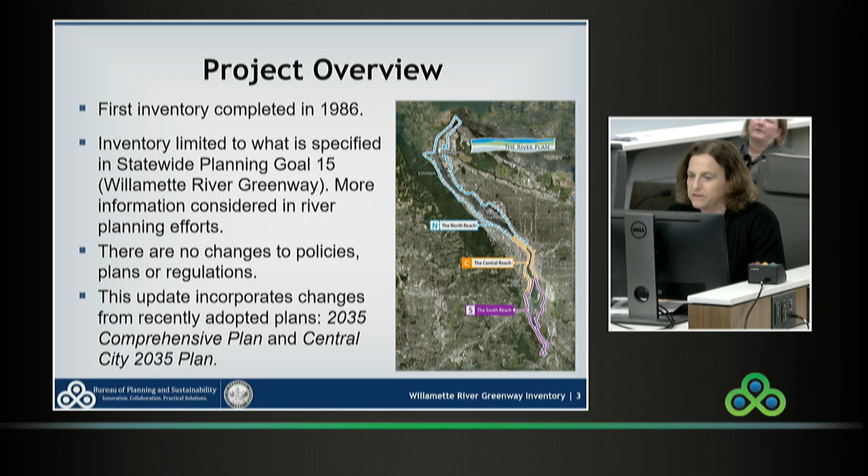Just a quick little bit on the process. We developed this proposed draft of the inventory in February. We sent notices to over 5,000 property owners and others interested in the topic about an open house and this hearing. We communicated this project through our River Plan News, which is an electronic newsletter, and through the project webpage. On March 6th, we held an open house on the inventory, and 15 people attended.

So the inventory is made up of maps and data, and these are the topics that are reflected in the inventory as per statewide planning goal 15: land uses, base and overlay zones, ownership, natural resource characteristics, recreation, and historic cultural resources. Most of the data comes from our geographic information system data. There's also county and other data sources reflected in this inventory. The 2 notable changes to the inventory reflect the Central Reach, and again with the Central City Plan, there have been changes to zoning, overlay zones, and scenic and natural resources. Changes elsewhere in the Willamette River Greenway boundary reflect new zones that were applied through the 2035 Comprehensive Plan.

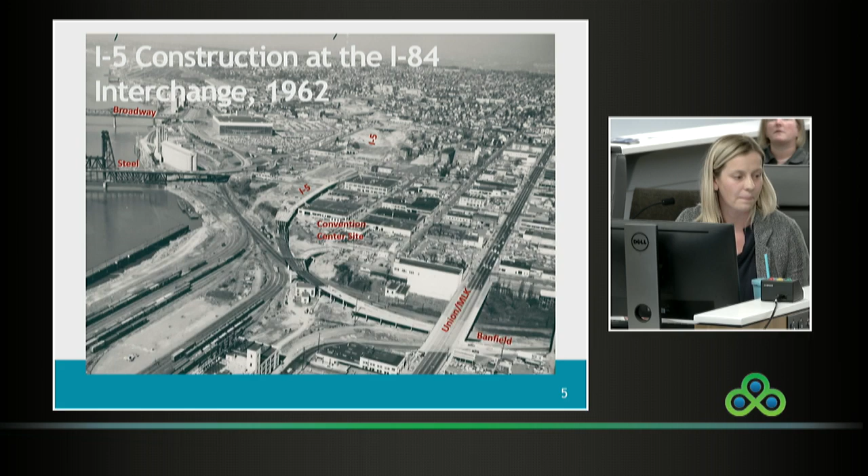All right, can you hear me? So, Mauricio here - I was there in 2010 when the city, Portland, and ODOT got together to see if they can do something better about this area. We had done a lot worse in this area in the 60s.

As you can see in the picture, and Caitlin already mentioned the impacts - you can see the building of I-84, the building by I-5, thank you, the Memorial Coliseum, and then the Emanuel Hospital. So a lot of interventions that really decimated what was once a vibrant city, African-American city of Albina.

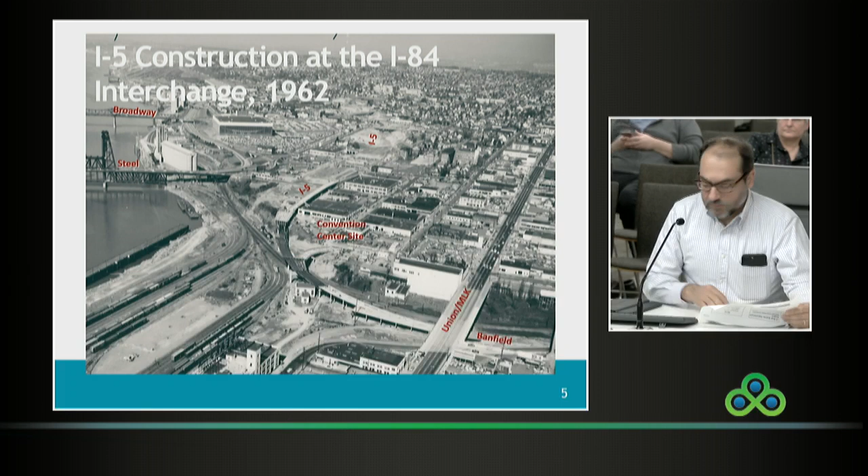An idea that we've always had is, can we get some of that back, some of that connectivity that we lost, among other things. So the city was engaging in the update of the Central City Plan, and we decided after the framework plan to do a quadrant. This was the first one, Northeast Quadrant.

As we looked at what to do, what could we do, we looked at obviously the freeway as, so to speak, the big elephant in the room. How can we improve the area without really addressing the freeway impacts? So that led to conversations with ODOT as to what could we do together - is there something that we can do that actually benefits the freeway network, the regional, state, and national network, as well as improving the area that we're working on?

And we engaged in a long conversation to see what that would look like, and what a planning process would look like, and what are the things that were acceptable and not.

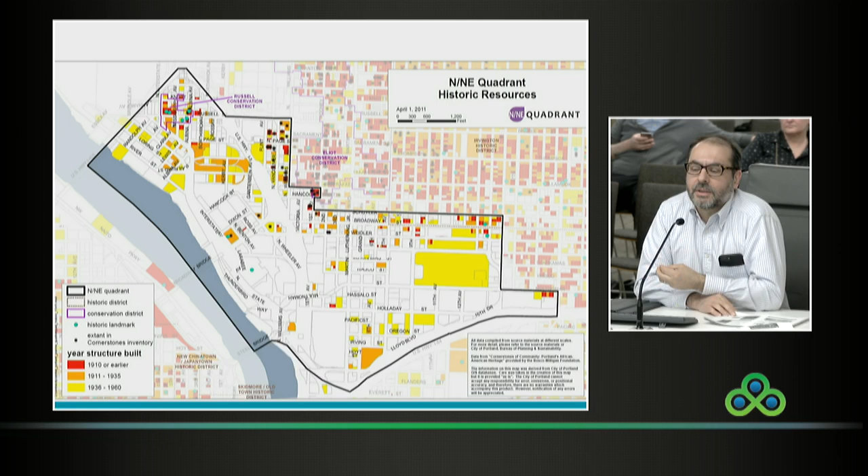Here you see a picture of an inventory that we commissioned - the Bureau of Planning at the time, and Sustainability - to identify the historic resources, many of them African-American resources, and we made a commitment that as we work on the design, we would not further affect this inventory, which was so lost. You can kind of see outside the study area, all that red means old, and white basically has been replaced. So we did a lot of history.

There's a lot of important buildings, like the Left Bank building, which has a history with the jazz music history in Portland. Also nationally, you can see there Louis Armstrong. So a lot of assets that we had that are underutilized because it's surrounded by this freeway that affects the local system.

At the same time, acknowledging that this is part of the city, but also part of a regional network - this area, the Rose Quarter area, it's an interchange that funnels I-5, I-84, which actually terminates here, I-405, and Highway 30. So it all has to converge in two lanes, in a very narrow space by design.

Two lanes cross under Broadway and Weidler with no shoulders, so if there's a crash, there's nowhere to pull over. And we see delays through much of the day. It also provides access to the Lower Albina area and directly to the Lloyd District in North and Northeast neighborhoods.

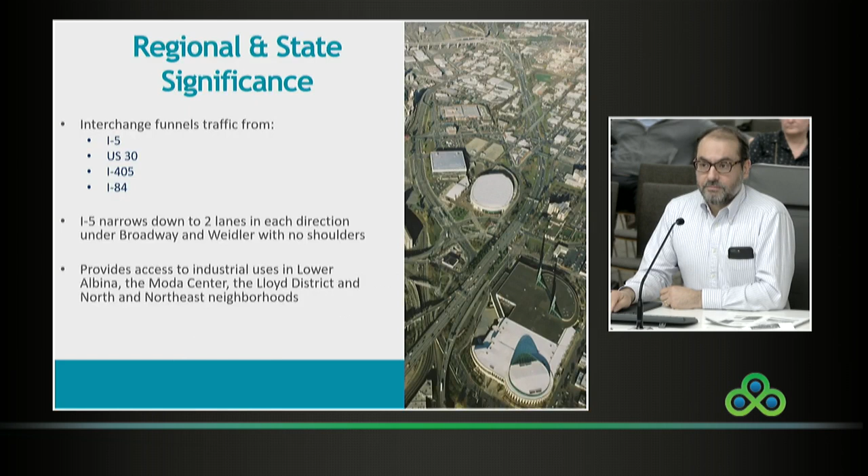It's also one of the major freight bottlenecks in the country. So the answer was that with some preliminary analysis, there were things we could do that would benefit the city and the regional system, the ODOT system. But we could do better than this project.

This is the project that was in the RTP, the Regional Transportation Plan, as the thing to do. A very expensive project that significantly expanded the freeway with a flyover, removed local crossings, further distorted the street network that was replaced in the 60s, and caused a lot of loss of sidewalks and bicycle connections. So that was the starting point. That's what we were stuck with for many decades, trying to do what the regionals wanted to do.

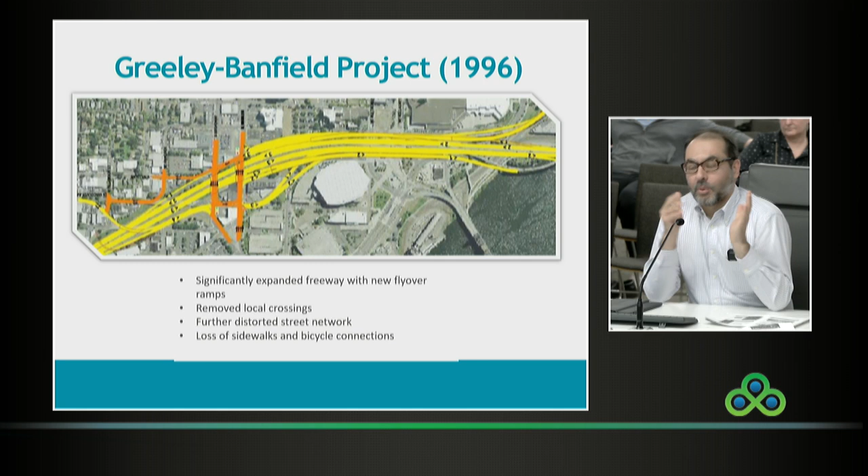We were saying, no, that's not going to work for us. Can we do something better? Let's explore it via this plan. So we got busy. We got a large committee of 30 people, and we developed a land use and urban design plan with a strong transportation component and a freeway facility plan, all together. They're not divorced, they come together.

So that's important to consider as you look at what's within the project you'll see later today. Those two projects have been adopted by council, by the Oregon Transportation Commission, and Metro, so they're part of the regional transportation plan. We formed a large committee and met 19 times. Overall, we had 85 community meetings.

Here's a summary over about 2 years. About 3,000 people participated directly. And we ended up with something that we think is a project that improves the regional network, the local network, and also provides the growth and urban design framework for the Lloyd District and the Rose Quarter to thrive. We're expecting about 8,000 new housing units and 9,000 jobs in the next few decades. This plan and project helps frame and reweave the two sides of I-5 in a way we haven't done before.

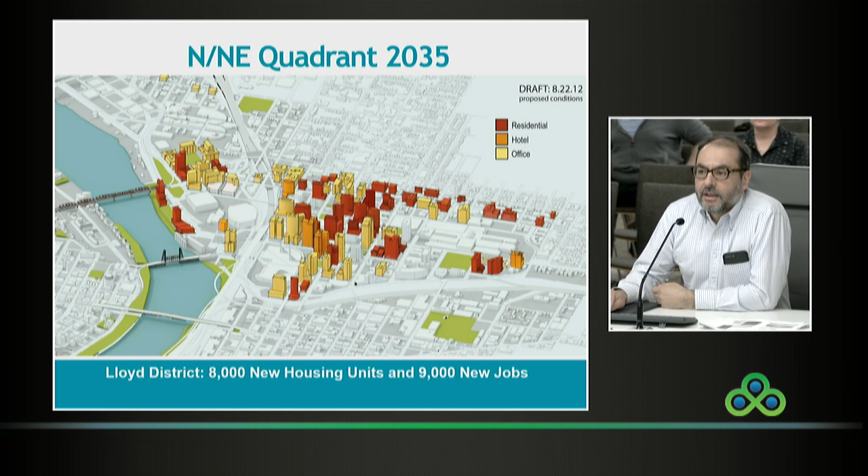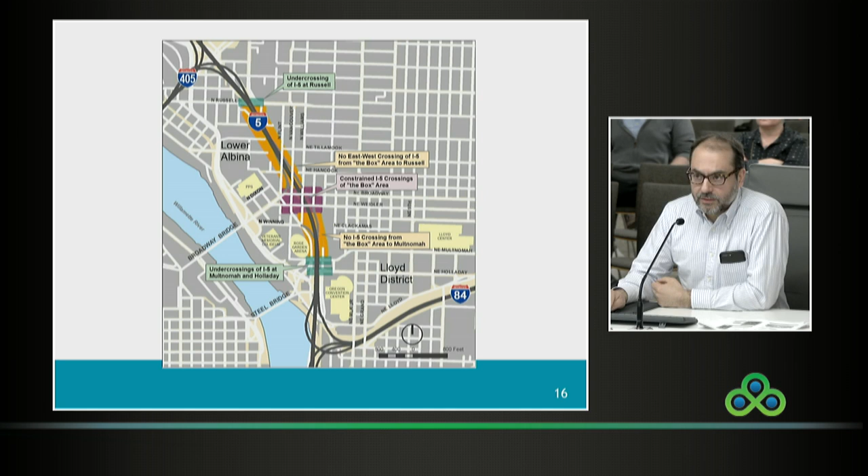And in a way that wasn't even contemplated in our plans. As you'll see, the idea of lids, the idea of replacing 5 bridges with new infrastructure, that wasn't even in our city plans at the time. A key component to consider is that there was a lot of lack of connectivity, particularly east-west. The areas in orange show that lack of connectivity. We were trying to address that, and as you'll see in the final design, we have connections to the south of Broadway-Weidler and to the north of Broadway-Weidler, again creating the redundancy that a grid used to provide, and now we wanted to provide again.

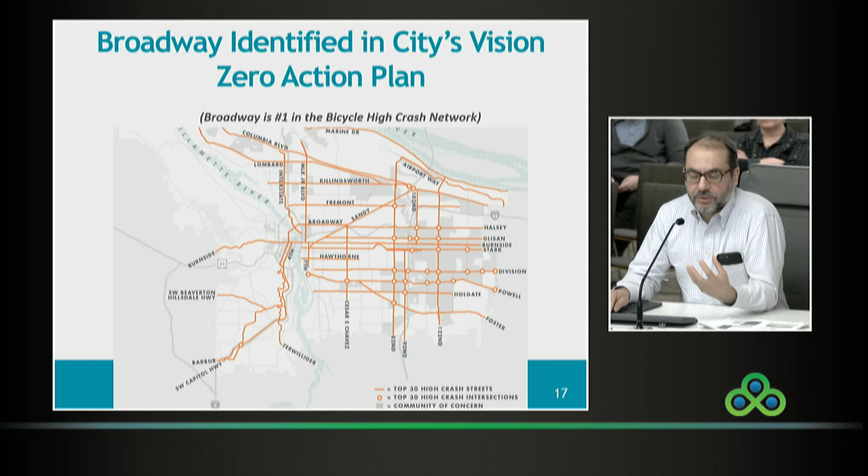Furthermore, since the plan was adopted, we went through the Vision Zero plan at the City of Portland, and Broadway was identified. We knew this at the time, it was a very dangerous place, particularly for cyclists, and we heard that a lot during the planning process. It's actually the number one corridor for bicycle-related high crashes, and the Rose Quarter is the most dangerous part of Broadway. This project addresses some of those physical constraints the area has, helping to meet many of our project goals, including connectivity, placemaking, densification, and safety.

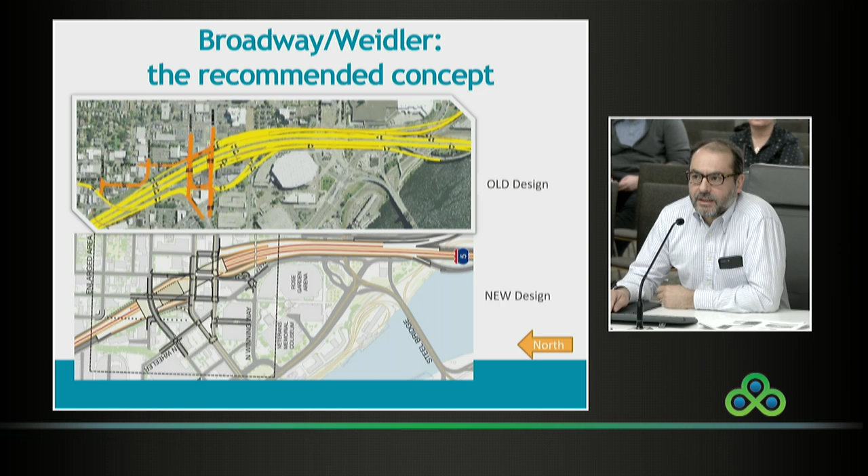So just to compare the old design, the Greeley-Banfield project, with the new one, I tried to put them as best as I could side by side. First, it's a lot smaller footprint, with fewer lanes, actually one auxiliary lane in each direction. There are a lot more crossings. You'll see one to the north, referred to as Hancock-Dixon, and one to the south, the Clackamas crossing, that you're going to see later.

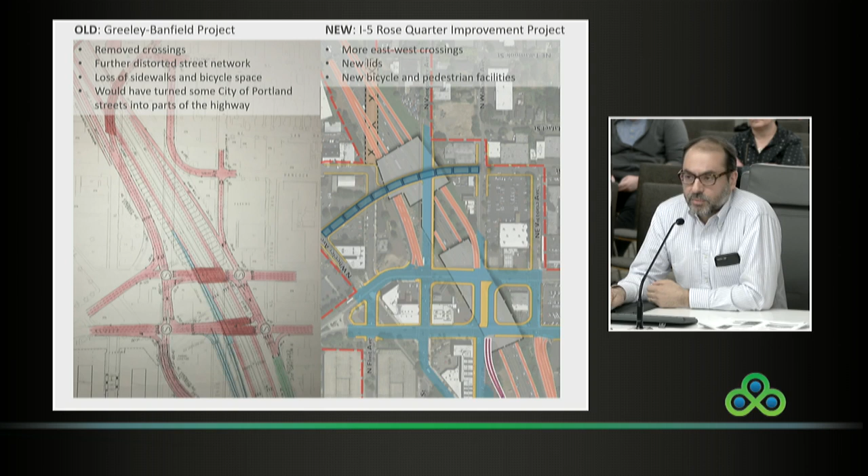But notice that the old design would basically reroute Vancouver and Williams and the other streets into frontage roads, basically becoming almost part of the freeway. The new design preserved, as best as we could, the grid we have and the functionality of these major collectors, as well as introducing new connections to the north and south, and two lids that can provide a lot of benefits to the project, including trying to bridge the psychological gap we have when we go over the freeway, as well as potentially providing some good uses on them. We'll talk more about that, I think.

So just in summary, the old Greeley-Banfield was replaced with a much smaller project from a freeway perspective, still providing the safety benefit we think we need, and I believe the report on the EA confirms that. But it's also significantly less costly and much better for the local network, much better than we've ever had in any plan.

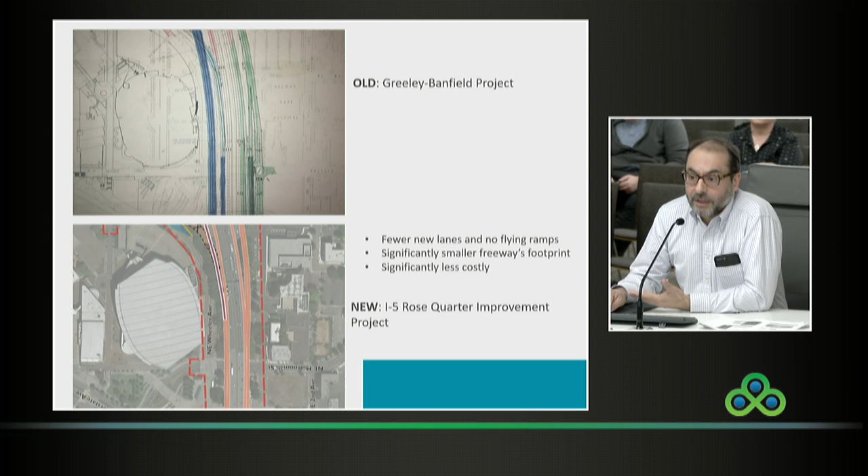So it's a compromise, but it's a compromise that has been very good. It has great potential to be very good for the city of Portland.

One of the key ideas was to create a network around this area, which we call the box. The box is basically where all the traffic funnels from I-5 and from the Lloyd District, going east-west on Broadway and Weidler, and Vancouver-Williams. By providing some redundancy to the north with this Hancock-Dixon connection, and to the south for pedestrians and cyclists via a new bridge at Clackamas, you were able to bypass the box, which is so constrained. Everything goes through it, so this creates an urban design space where you can go around it—quieter alternatives.

That's important also because it provided a new connection to Lower Albina, which now kind of lacks it. Flint goes straight across the freeway to Broadway, so by providing a new connection to the north, we opened up a new road to serve Lower Albina and the PPS Blanchard site, which is one of the master plan sites in the central city. There's a lot expected out of that site in the next 20 years, and this plan helps by providing greater access to Lower Albina.

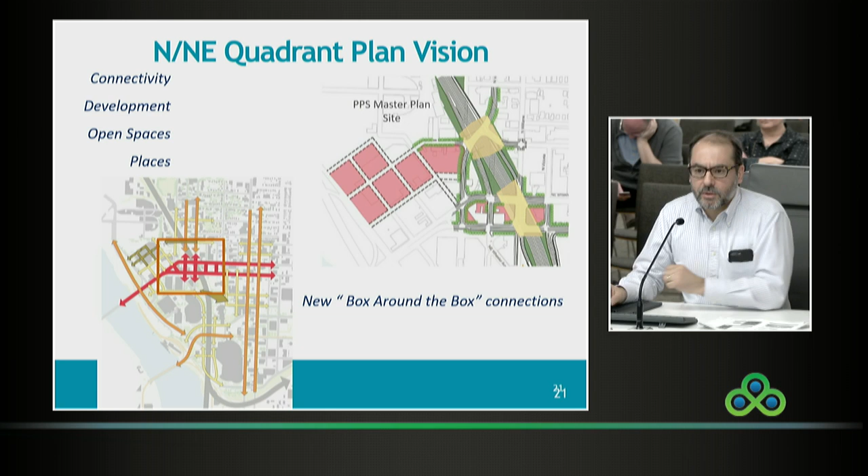So these are some of the big ideas we were discussing at the time, and they were translated into the final design. You can see this drawing from the time—lids between Broadway and Weidler, and one to the north. Why a lid? It's good for many reasons, but it also helped with the construction of the project.

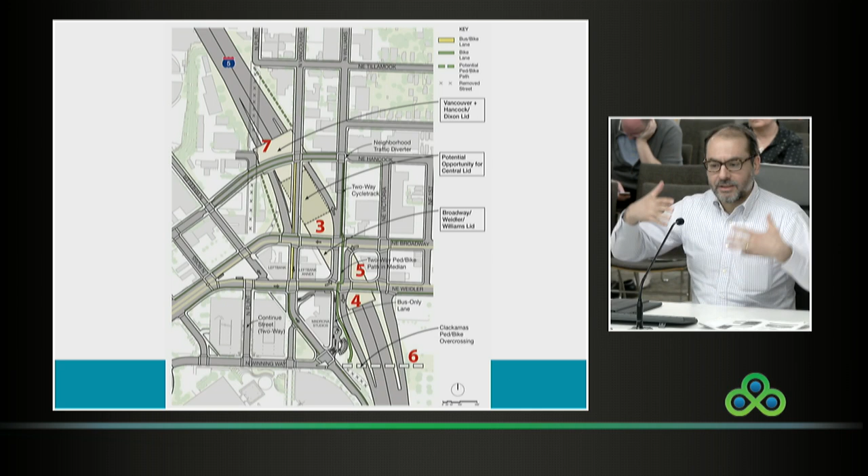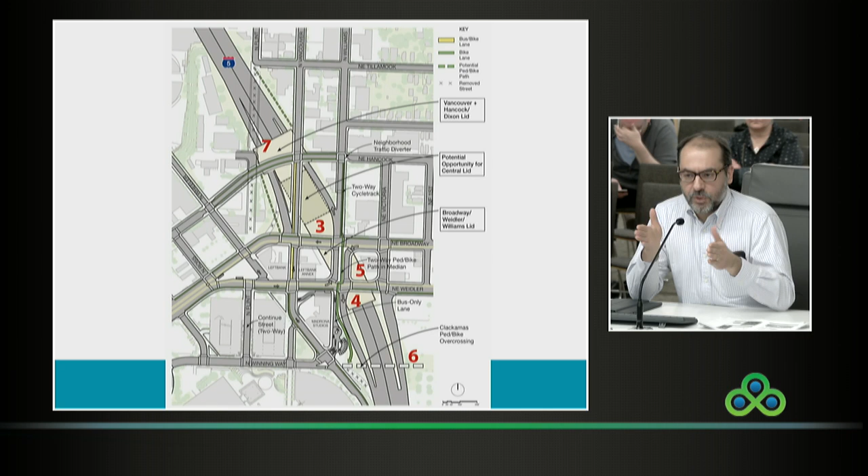All the bridges are tied together and they come at an angle. We have the east-west, north-south grid, but the freeway is cutting diagonally, so it's all kind of tangled together. It's a lot easier to just replace it in place. Also, on the freeway you have pillars that are over the bridges, so you couldn't really expand it unless you took everything out. This created a great opportunity to do it together.

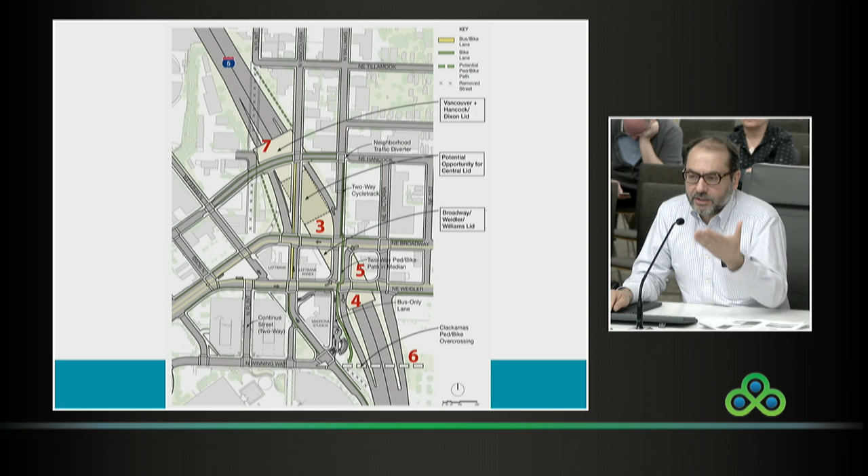So the new design, as you see, has new bicycle facilities, new sidewalk spaces, and five new bridges, more resilient, and lids that can provide a lot of benefit moving forward. I'm trying to move quickly because a lot of you have seen this before, but I think half of you are new.

This also helped support the land use vision, the transportation findings, and this multimodal mixed use area designation—a new designation that allows areas meeting density requirements to continue to densify and develop without the imposition from the state to watch out for congestion on freeways, which has slowed down development of other downtowns throughout Oregon. So this is a special clause in the books now that allows cities with high density areas to not have to address these mobility standards like other places.

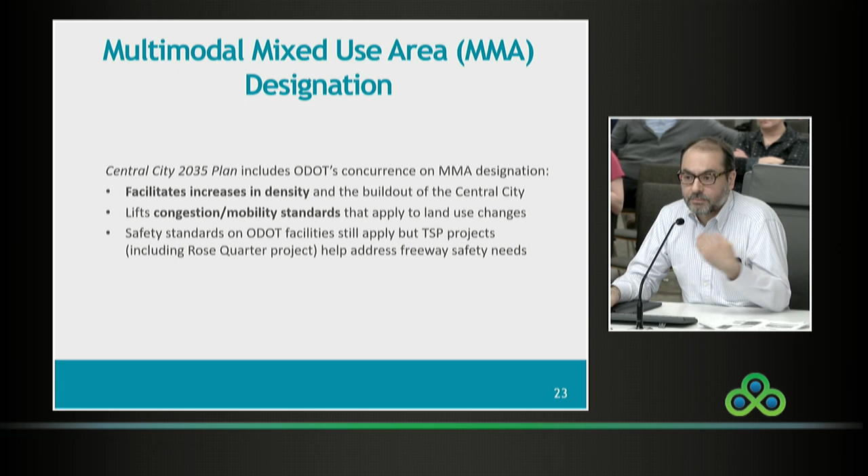However, to do that you need a concurrence from ODOT, and safety must be addressed. So this project addresses the safety component of this area of the Lloyd District. Therefore, with other projects in the central city, we were able to get concurrence from ODOT that the whole central city is an MMA designated area. This should help the city grow and densify with less red tape, more organically, as new land use applications come in and zoning changes and so forth.

So I think that terminates my very quick summary. Thanks.

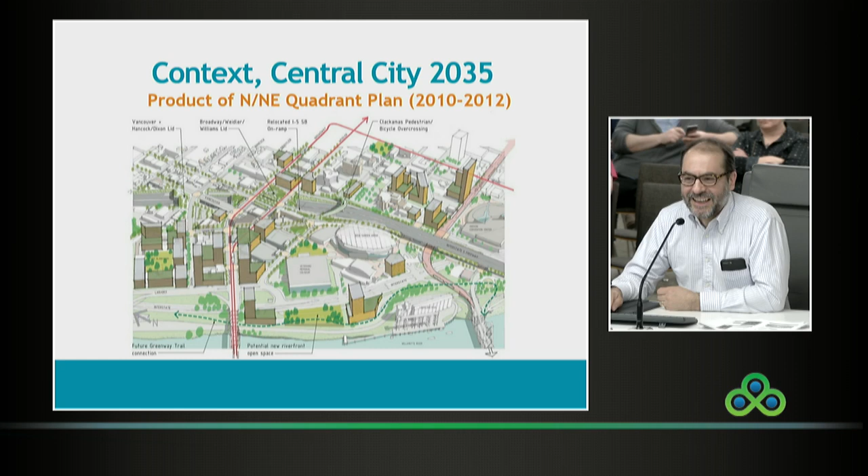All right, so picking up from that robust planning process, we are now in the environmental review phase, picking up with the recommended design concept from the planning phase. We just released an environmental assessment in February, and the 45-day public comment period closes on April 1st. That document looks at the impacts and benefits of the recommended design concept that Mauricio just spoke about. I'll get into the details of some key environmental assessment findings.

I just wanted to highlight the timeline. While this project has been a number of years in the making, with robust community engagement, there's still a lot of work to be done. The design is still very preliminary, with the design phase kicking off this spring and carrying through 2022, with construction starting as early as 2023.

And through that process, we remain committed to continuing to engage the community and be broad and inclusive in that engagement as the project moves forward.

Can I ask a quick question? Sure. When you say it's a very preliminary design, do you have certain phases that you call your design work? We do have certain phases. At this point, the project is about at a 5% design level. Perfect, thank you.

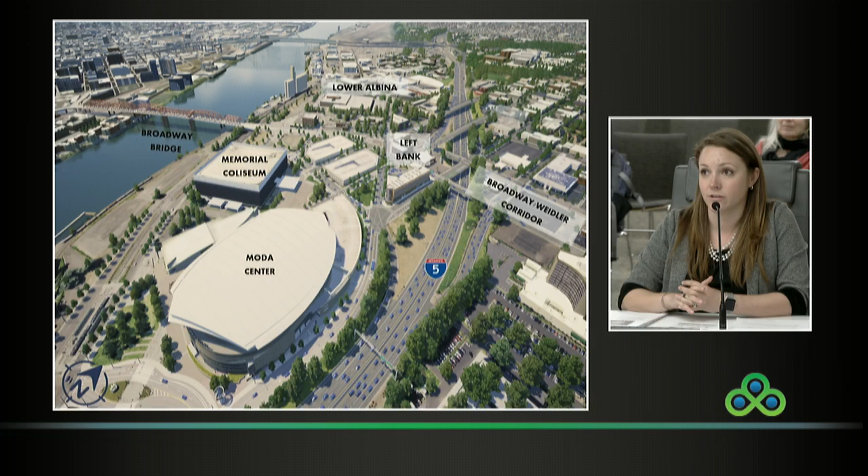So this is the project area today. You can see I-5 running north-south through the center here. It carries about 120,000 vehicles per day. You can see the Broadway-Weidler corridor running east-west, which Mauricio mentioned is part of the city's high crash corridor network for people driving, biking, and walking. Couple that with Vancouver and Williams, which run north and south through here, is one of the city's busiest bicycle networks, with over 5,000 people biking each day during the peak period.

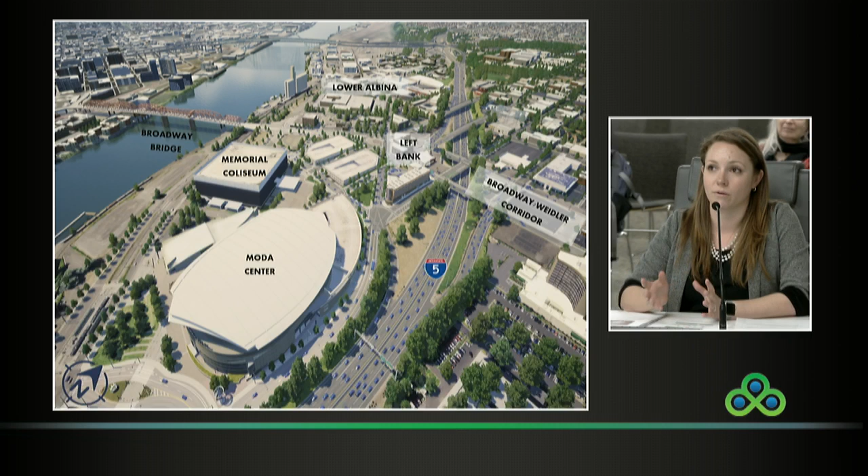There's also high-frequency transit traveling on Vancouver and Williams as well. You've got TriMet with their bus service on Vancouver Williams, and Max through Rose Quarter Transit. And then couple that with a Blazer game or a Winterhawks game at one of the entertainment facilities. That's all to say that there's a number of individuals and people using this area. And so as we look to address improvements in this area, we're looking at ways where we can better connect rather than deepening the divides that were created in the past.

So this is the purpose and need of the project. Mauricio hit on a lot of these points, but the project is driven by a significant need on our transportation system with congestion issues on I-5. Again, this portion of I-5 carries some of the highest traffic volumes in the state. And this area serves not only the city of Portland, but the region, state, and West Coast as the interstate connection between Mexico and Canada, and is a significant portion of the freight network.

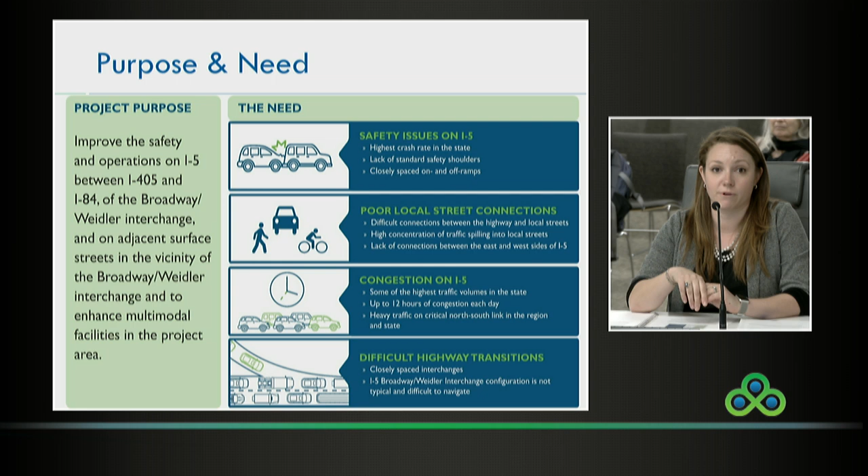Yet it does see about 12 hours of congestion each day. And this congestion is recognized as a statewide issue, and it affects the reliable movement of people and freight, which then affects our economy in the area.

There's also frequent crashes on I-5. This segment of I-5 through the Rose Quarter sees some of the highest crash rate in the state of Oregon. It's about 3.5 times higher than other urban interstates throughout the state. And within this 1 mile segment...

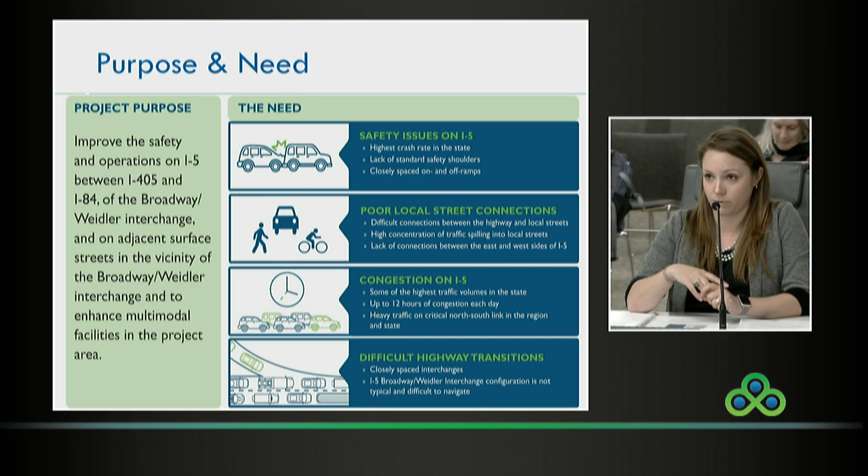Megan, if I could interrupt. Sure. How does that crash rate compare to the urban arterials that ODOT manages in the region? So crash rates are compared facility by facility, and so the 3.5 times is comparing to urban interstate facilities. I don't have the numbers to be able to compare.

Isn't it correct that crashes on ODOT's arterials are significantly higher, and particularly the fatalities and serious injuries are much higher on the arterials? This area of I-5, the primary crashes that we do see on this segment are rear end and sideswipe collisions. But that said, it is still the highest crash rate in the state of Oregon.

And with not having shoulders in this area, when there is a crash on I-5, there's no place for drivers to move out safely of traffic. And so that then further compounds the congestion with only having 2 lanes in each direction. There's also difficult highway transitions with 3 interstates coming together, closely spaced interchanges, and a complex interchange configuration, which then also further compound the safety and operational issues in this area.

And as Caitlin alluded to with House Bill 2017, these needs were really recognized at a statewide level. And so our state legislature, through House Bill 2017, has provided funding and direction to move forward and address these needs in the Rose Quarter area. There's also a number of local needs, which I'll turn to Caitlin to address as well.

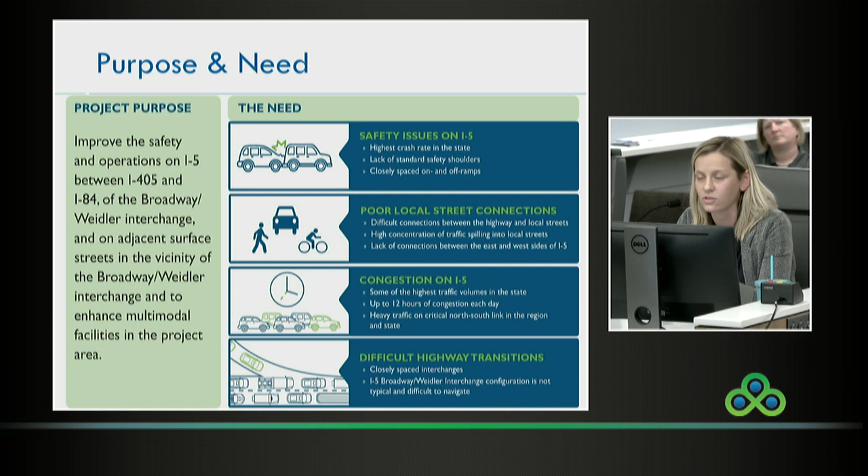Caitlin, are you able to? I don't have any controls. Let's see. Oh yeah, there you go. Do we have sound? Do you know if the sound is turned on? Pull you out of the presentation, actually. The keyboard. Sorry, thanks for bearing with us. It's always the tricky part, the videos. We tried to get fancy. Has worked before. We were doing so well. Still doing well. Okay, you might want to. I think they did. Okay. I don't know how loud it's gonna get. Okay, when we've done it before it's been at like 50. I don't know if that. Well yeah, but it's not. Oh, okay, all right.

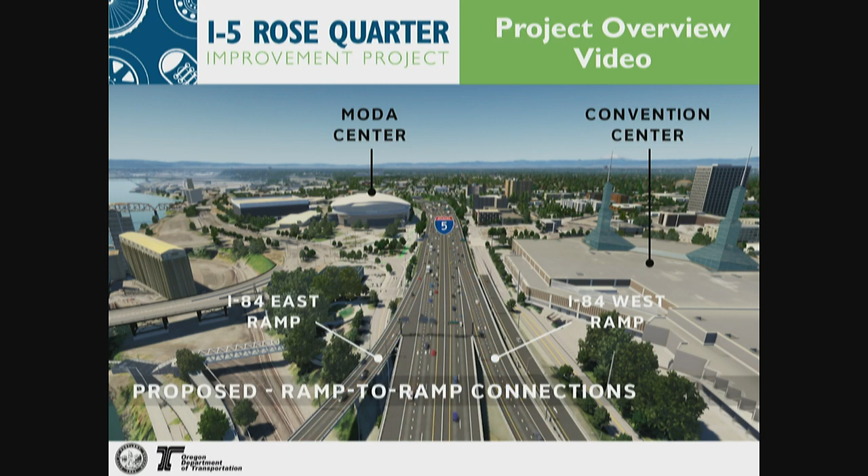The project will improve safety and operations on I-5 by adding continuous 12-foot shoulders and a new ramp-to-ramp lane in both directions of the highway between I-84 and I-405. The ramp-to-ramp lanes will give drivers more time and space to merge, reducing frequent crashes and congestion points, ultimately saving over 2.5 million hours of travel time a year.

The project provides new connections across I-5. The first is a new path over I-5 for people walking, biking, and rolling from the Northeast Clackamas Street area to the Rose Quarter, creating a safer, more comfortable way to get around. The crossing will be a key part of the city's Green Loop, improving bike and pedestrian access between the Willamette River, the Rose Quarter, and the Lloyd District.

The new replacement bridges over I-5 will be in the form of highway covers. These covers will provide space for wider sidewalks, protected bike lanes, and opportunities for new community spaces. The project team will work with the local community to determine how the new space on top of the covers can become the best asset for the neighborhood.

The project will introduce a number of safety-related improvements for bicycles and pedestrians. Here is a closer look at a concept for the Williams-Weidler multi-use path. When the project is complete, Williams Avenue between Weidler and Ramsay will be exclusive to buses, cyclists, and pedestrians. A new 36-foot wide multi-use path along Williams Avenue will provide separation from vehicles for cyclists and pedestrians moving through the interchange. It will also reduce bicycle-pedestrian conflicts with the existing I-5 South on-ramp at Weidler.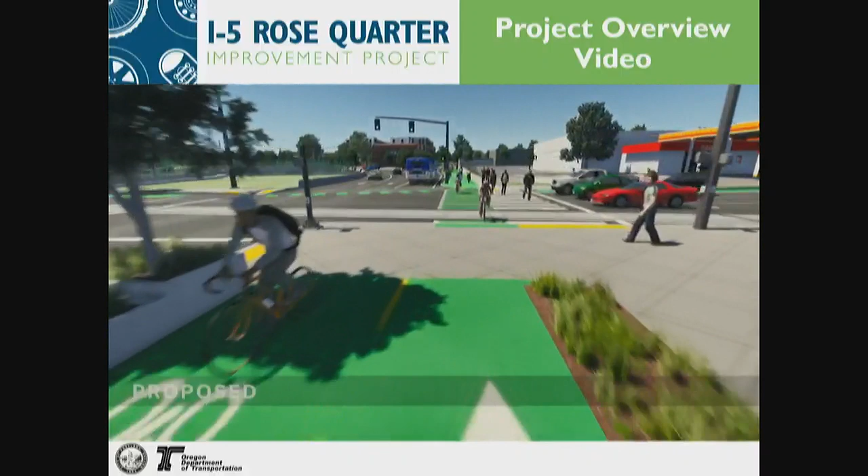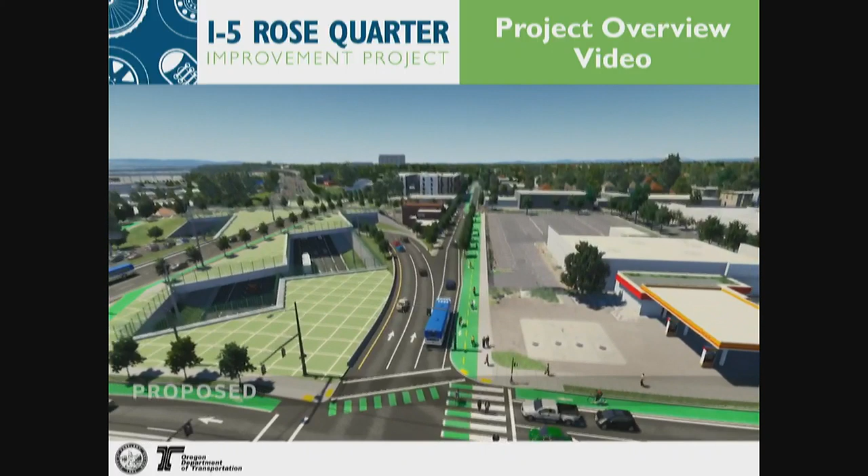The project team will work with the community as elements of the path are designed, including the space between bicycles and pedestrians. These improvements enhance key connections in the local street network, address Portland's Vision Zero safety priorities, and make the area more accessible to people who walk, bike, roll, or access transit.

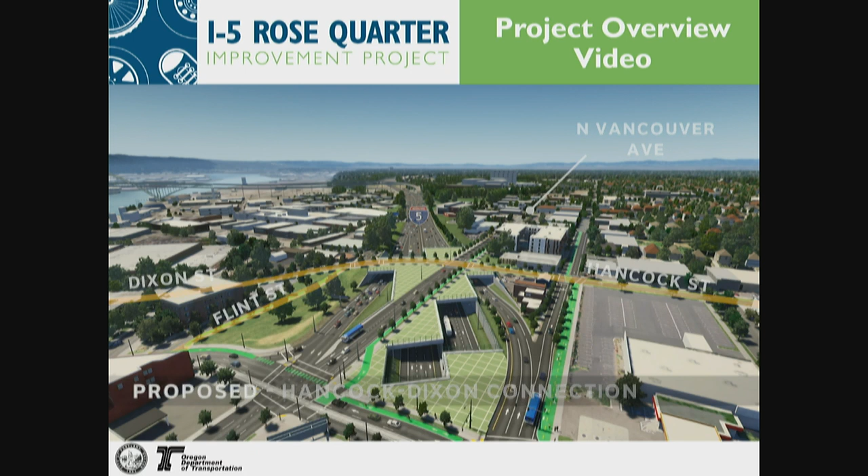One of the new highway covers will span I-5 and connect Vancouver Avenue with a new road that links North Hancock to North Dixon. The existing Flint Street Bridge will be removed, and North Flint will end at Northeast Tillamook Street on the north side of I-5.

The Hancock-Dixon crossing and multi-use path will provide a new direct connection between the north and northeast neighborhoods and Lower Albina. The crossing will provide an alternative to the Broadway and Weidler intersections at Vancouver and Williams.

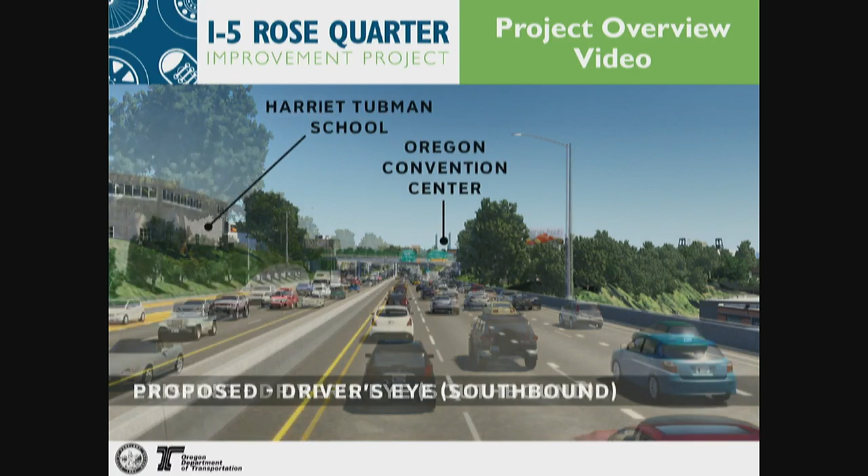As we turn and head south, you can see a driver's view on I-5. Here, you can see the ramp-to-ramp lane that connects I-405 to I-84 and experience traveling under the highway covers.

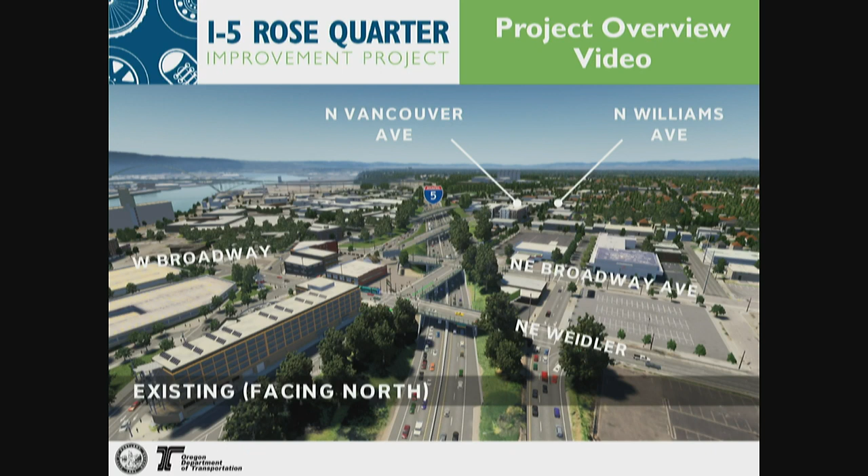The I-5 Rose Quarter Improvement Project is an opportunity to create community connections. The project seeks to strengthen the area as a highly accessible and multimodal hub for moving people and goods.

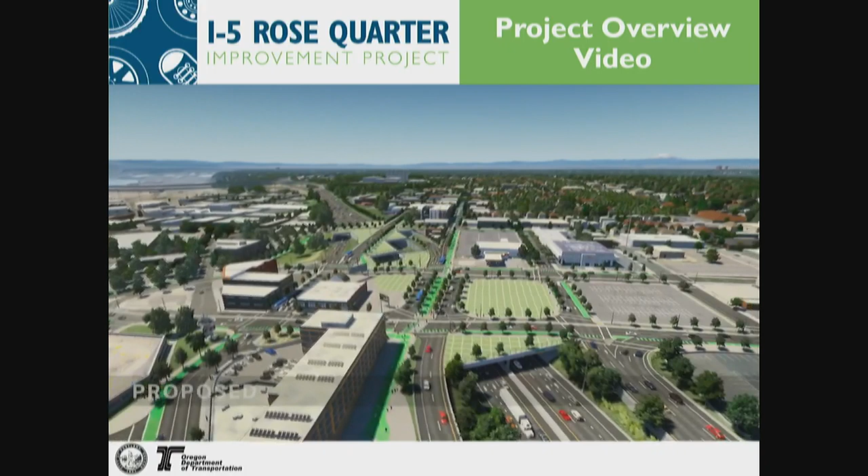For example, improvements at the Broadway-Weidler interchange, which sees over 5,000 bikers a day, will improve safety and enhance the biker-commuter experience. Improvements on I-5 will allow freight trucks to move more smoothly through the area, getting to their destinations quicker. And the transportation improvements will act as a catalyst for future redevelopment, including high-density development that includes employment and affordable housing that is consistent with current city plans.

ODOT and the City of Portland are planning for an improved Rose Quarter area where people walking, biking, and rolling can comfortably cross a bridge over I-5 that is designed just for them, where cars and freight trucks on I-5 have more space and time to merge while traveling through the area, and where getting from the Broadway Bridge to the Lloyd District is easier for all.

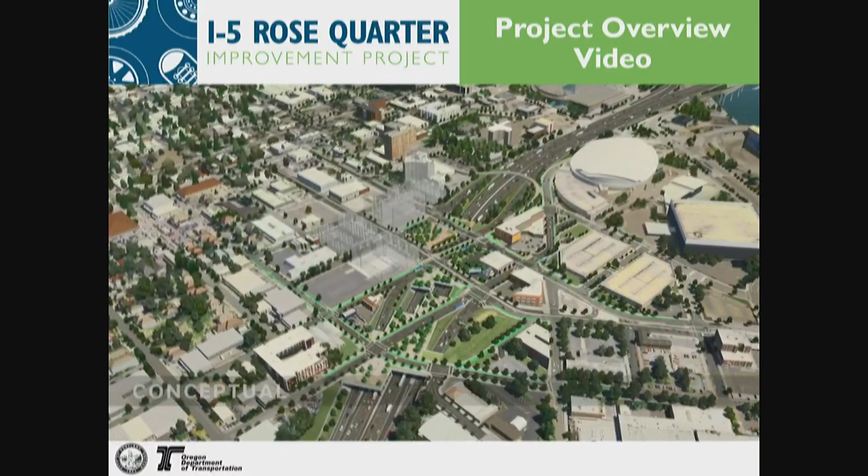Through this process, building again from the great work that was done during the planning phase, we've held a number of community engagement opportunities and worked with the community as we were evaluating the environmental effects of the project.

With over 50 outreach events held between 2017 and 2018. But before we kicked off the environmental phase and this work, understanding the well-documented history of the project area, we took an intentional approach to ensure that we were reaching communities of color and low-income populations as part of this. Before kicking off the environmental review phase, myself and our community affairs manager at the time, Shelley Romero,

conducted interviews with members of the African American community to better learn about the project area history, get input on what they saw as an effective and meaningful process moving forward that we could then use to shape our process and the project to create a broad and inclusive engagement process.

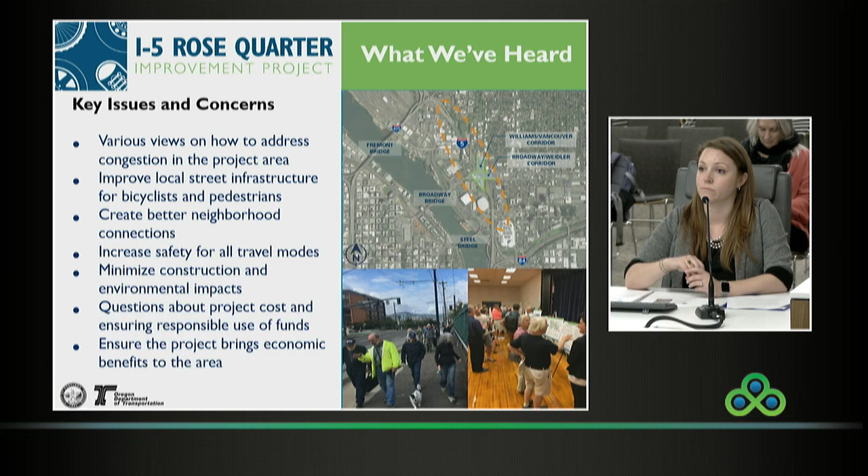We also got a lot of questions around project cost and ensuring that the project provides opportunities to bring economic benefits to the area, specifically the communities that were harmed during the original construction of I-5 and other urban developments in this area.

So now we're in the environmental review phase, and we've reached the key milestone of publishing the environmental assessment. Before we jump into the key findings, let's take a step back and ask, what is an environmental assessment? An environmental assessment is part of the NEPA process, or the National Environmental Policy Act.

It is a federal requirement for projects that have federal funding or require federal approval to go through and evaluate the impacts and benefits of the project. So we're doing this in the form of an environmental assessment.

We're evaluating the build alternative, which is the project that came out from the planning phase, the recommended design concept, and comparing that to a no-build alternative, or not building the project. We forecast out to year 2045 for that analysis to measure the long-term effects of the project, given the significant transportation investment.

FHWA, the Federal Highway Administration, is our federal partner in this process. They will review the technical findings of the environmental assessment along with all the public comments received during this active comment period to inform their decision on the NEPA decision document. All of that public input and analysis will also inform future design for the project.

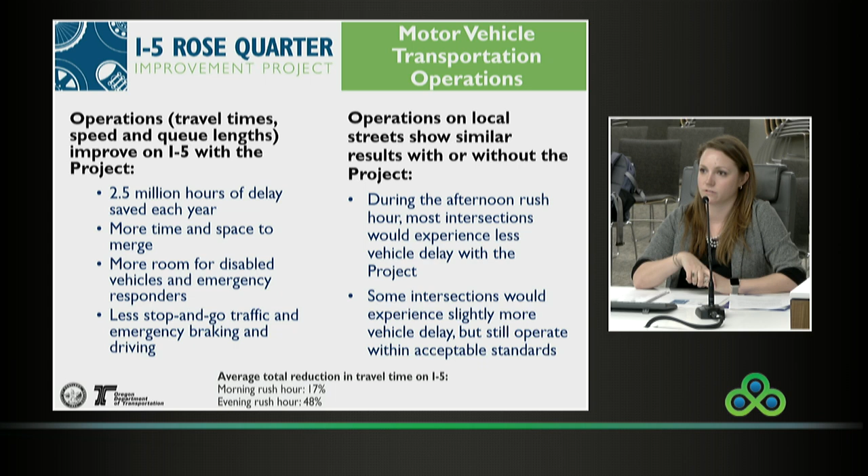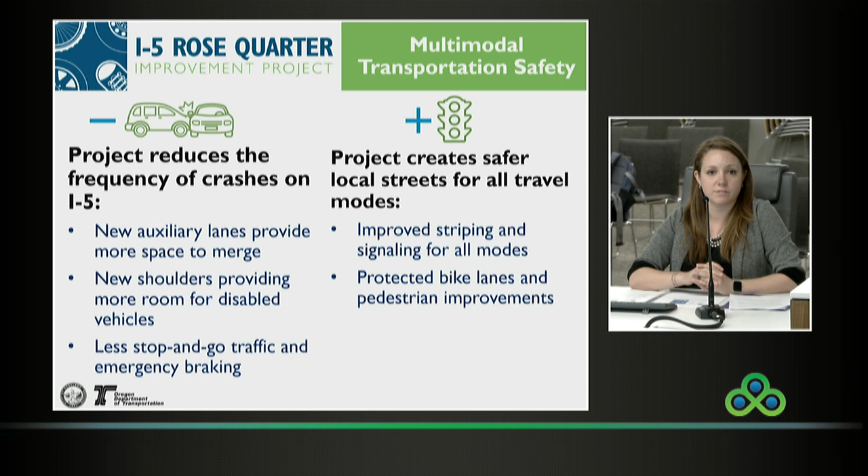In terms of safety, again the addition of auxiliary lanes and shoulders provides a reduction in crashes on I-5, and looking at the local street system with greater separation of modes, protected bike lanes, and wider sidewalks, we also see significant safety benefits to the local street system.

So I'm going to turn it back to Caitlin to walk through some of the active transportation elements. Sure, Mike. Yeah, great, thanks.

What do you mean by the ramp-to-ramp lanes? Could you explain that in a little more detail? I mean, it's a feature, and I wasn't quite sure why that was a feature.

You'll commonly hear two different terms for the same thing: ramp-to-ramp connections or auxiliary lanes. Those are the lanes on the highway where you're getting on at one entrance and it carries directly to the next exit and ends at that exit. It gives drivers more time and space to make their merging and weaving movements.

So it's just a lane that goes from one ramp to the next one. Correct, with short stripes. And why does that give you more time?

Because when I come down I-5 trying to get to 84, it seems like there's going to be a lot of this merging no matter what. I'm not sure why the ramp-to-ramp means there's less of that — I would think there would be just about the same amount.

With the new ramp-to-ramp connections, rather than having those movements happen in a really short distance, the distance drivers have to make that movement is greater. It doesn't necessarily mean less merging or weaving, but the length of space to do that is greater, which reduces the conflict you see with vehicles.

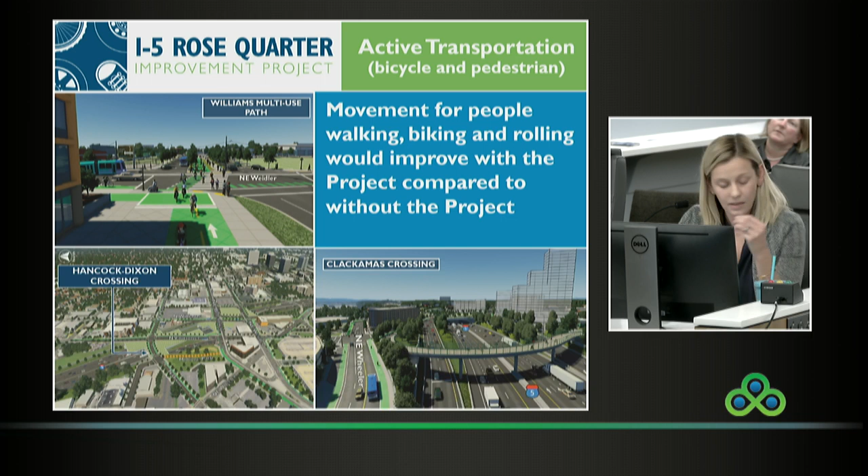Let's flip to the next slide — I'm going to go into a little more detail on each of these elements. The Clackamas Bike and Ped Bridge is that alternative connection between Lloyd and the Rose Quarter on the southern side. Two things to note here.

First, this crossing may look like it's designed, but it's really just a concept. This shows one way you could deal with a grade challenge on the west side in terms of the landing point — the crossing curving up towards Weidler. This is something the city will continue to work on with ODOT and others to find a design solution for how people using that crossing could more easily connect into the Rose Quarter closer to the intersection of Williams and Ramsey.

We're also looking to take the greatest advantage of this new connection and what local surface street improvements may be required for that. On the west side, looking at the street, pedestrian, and bike facilities where it ties in — this is up close to the Calaroga Terrace area, so we'll be looking closer at that.

So, a question about that: the Bicycle Advisory Committee has commented that they basically don't know if this facility is useful or not, because the endpoints don't really align with other parts of the network.

A question I've asked in other venues, and I hope you have the answer tonight — what's the elevation gain to get over that crossing, total elevation gain? Commissioner Smith, I had my team look at this, and I'm sorry to say I did not bring that number for you, but I know you've asked before, and I promise to get back to you with that number.

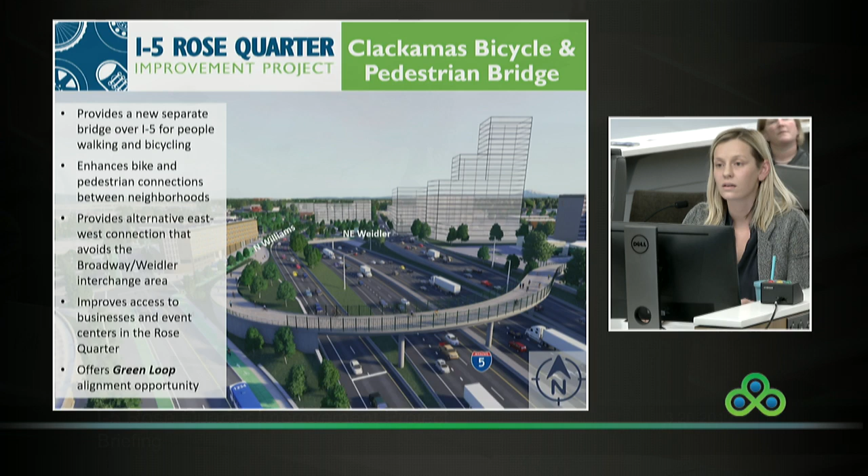I do, and Chris addressed a little bit. I mean, and I realize this is early design, but it does seem like it's a circuitous connection that I don't understand why I'd take. Like, I would avoid it because I feel like it's taking me out of my way for a lot of, and maybe I'm not getting the whole connection network.

Well, if you came from the south, as part of the Green Loop, you will go across the Sullivan's Crossing that is going to be built. You would go on 6th or 7th. You could take a left on Clackamas, and we would put you right in that spot. You go across, you go through the Rose Quarter, and go through the Broadway Bridge. So it does provide an efficiency there from that Green Loop movement.

So also, it's not there today. What we have today is basically not a lot of development. But again, we're expecting 8,000 jobs and 5,000 households. So the area around it will feel a lot more dense, and there'll be a lot greater ability to use the facility. Also, as events happen, we can envision a lot of people just crossing it to get to the Rose Quarter Arena. A couple of examples.

Fair enough. So maybe it's just graphics, but like if I'm just looking at a map, I'm like, why wouldn't I just drive up to Weidler and cross at Weidler? I mean, I guess it seems just out of my way is all, like just intuitively. Yeah, it depends on where you're coming from. Yeah, I guess I'm thinking south. But anyway, okay, for whatever it's worth.

So maybe it's just me not getting my head into it more, or your graphics might help understand the connection with the rest of the network and make that more understandable. Okay. Yeah, and as part of the upcoming urban design work that we will be embarking on as well, working with the community to kind of figure out how this bike ped bridge ultimately looks and how it connects, we'll address these questions that are really important.

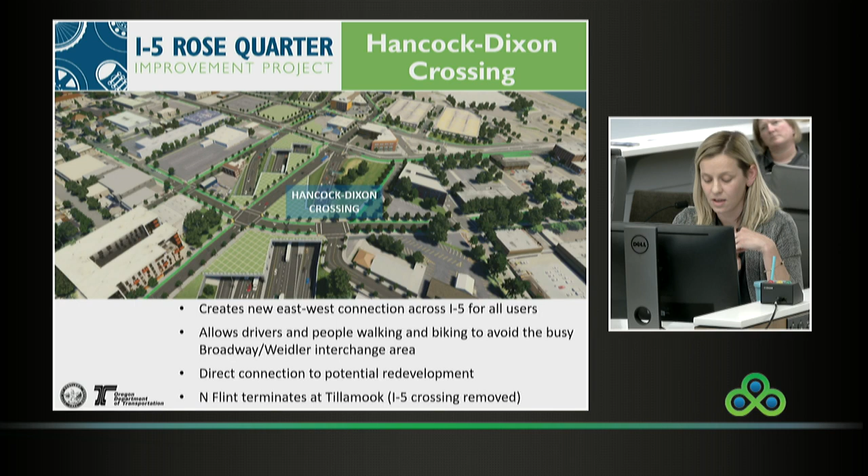So the project is also including in the environmental stage and continuing to study the integration of a multi-use path, which would be another alternative connection that would have ADA compliant grades. And then again, another alternative for someone walking or biking that doesn't want to use a potential multi-use path or a steeper grade on the Dixon side could be to stay on Vancouver to Broadway in those improved bike and pedestrian facilities. And then taking a little bit closer look on the next slide in terms of the changes.

Before we leave that, I have a number of questions about this. So as you said, there's a 10% grade for more than 100 feet, right? That's clearly not ADA. I would say that's not a pedestrian street. It's not a bicycle street. It's an auto street. And this is the magic connection that's going to open up the Blanchard site, right, Mauricio?

So our TSP says we should have multimodal streets, and we should be prioritizing pedestrians, cyclists, and transit. Streetcar can't handle more than the 7% grade, so we're never going to run a streetcar through that connection. So how does this actually open up the Blanchard site for anything other than cars? And if that's all it does, then doesn't it fail our TSP?

I don't think a single element of a project can be just passing or not passing the TSP, but as a whole, the project does increase connectivity. We learned as part of this environmental assessment that we have this great grade differential, for which, as Caitlin mentioned, you can keep going straight south and take a right, and you end up at largely the same point. We have in the city of Portland steep grades, and they're still called streets, and they're still walkable and bikeable, not by everybody. We regret to say that we have this great differential right now, but we have also provided two alternatives so far. It will be a street. It will have sidewalks and trees and utilities and freight and deliveries, but it won't be as convenient as a flat route. But I wouldn't call it a car-only route.

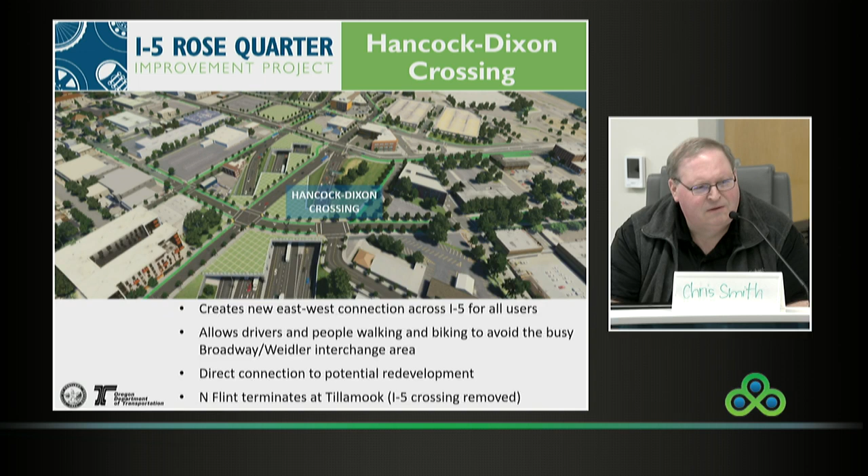I'm not sure that it does generate more traffic, but we can look into the analysis. It doesn't generate more traffic. Why do we need it? It will provide more access. I'm not sure the analysis during the PM peak shows a much greater volume on Vancouver Williams. I don't have that answer with you, but it should provide more connections, just like any local street provides some connectivity.

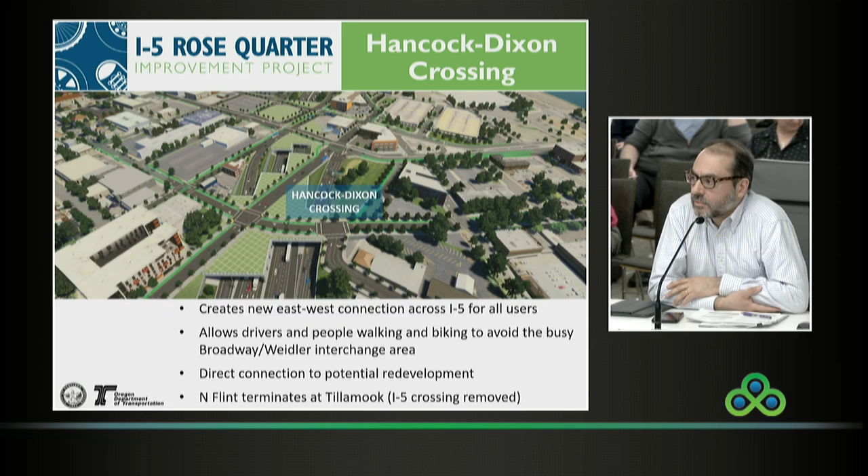Today, Flint is used really as a cut-through route by autos and freight to access the Broadway Bridge from northeast Portland. The majority of that traffic is one-way, from north to south, but it's also a very popular bike route for people accessing the Broadway Bridge from Vancouver. So with the project, Flint would terminate, it would turn into Tillamook, and that crossing of I-5 would be removed. The safety benefit being that the cut-through traffic in front of the middle school would be eliminated.

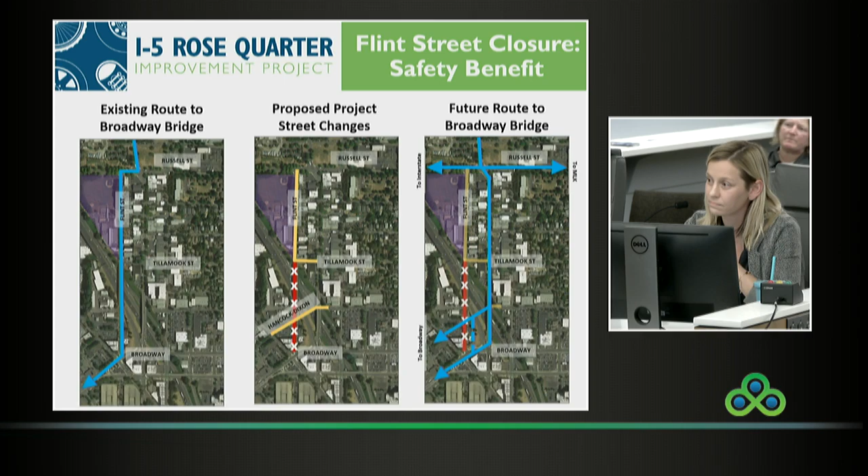I appreciate your concern for the school. I'd note that you're also moving the freeway significantly closer to the school with attendant air quality impacts. And in fact, the Portland Public School Board has asked that you proceed to a full EIS to evaluate the impacts on the school, correct? Yes, they have made that request. Thank you.

So the next slide, looking at transit, most of transit operations really stay the same with or without the project. Part of this is due to the project area really focusing on this interchange and not being a longer corridor project. That being said, the improvements proposed to address pedestrian, sidewalk quality and crossings and other local street improvements can improve safe transit access. And I believe, Commissioner Smith, you've already mentioned that streetcar travel times really remain about the same.

I think there's a very slight improvement anticipated with the project, and there are no impacts to light rail. There's a slight bus delay found due to the added signals and separation of modes on Vancouver Williams. The new signal proposed at Hancock-Dixon is also addressing a pedestrian crossing gap.

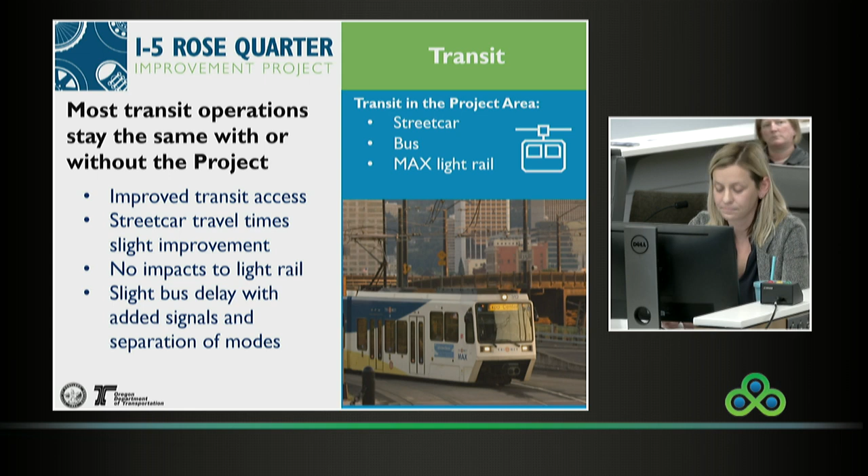That's one of the areas of a very common trade-off we see in terms of adding protection, separation of modes, and potential delay. So let's talk about delay a little. You've touted 2.5 million hours of vehicle delay avoided. Have you calculated the additional hours of person delay through delaying cyclists and the 4 and 44 bus? We did not calculate it in terms of person delay, we did it in terms of looking at operations and movements of the bikes and vehicles.

I'll remind my colleagues that our TSP prioritizes people walking, biking, and taking transit ahead of people in single occupancy vehicles, so I think it's contradicted here. I understand the east-west streetcar movement is approximately the same also for the 17 bus in that area, but the streetcar CAC has requested a transit priority lane so we can improve operations of the streetcar. It may not be getting worse, but it's not getting better either. If we're going to spend $500 million, we really ought to make transit work better, not just staying the same. That's not good enough.

I think I've made the point that we're delaying those modes contradictory to our TSP.

I appreciate your comments, Chris. I guess the only question mark in my mind is if through signalization, which is causing a lot of the delay, it's making things safer, you're still prioritizing the peds and bikes, which are adding to the delay at the intersections, because you're trying to make things safer for them. If the signals and delays are happening due to increase in bike lanes and pedestrian connections, then they're intertwined, is all I'm trying to say.

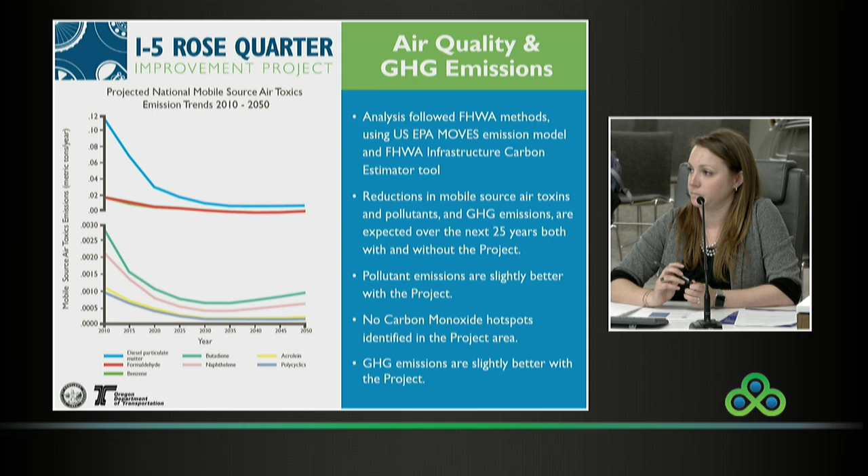So if we could talk about the assumptions behind that. Emissions go down because you don't have the stop and go, you have more freely moving traffic, correct?

That only happens if you assume no induced demand and that you don't pick up more traffic as a result, right? So you've assumed no induced demand here, is that correct? We are not adding new through lanes as part of the project, and so the project itself is not inducing new corridor-wide trips on I-5.

Okay, so I have some challenges with that assumption. Back in 2012, when this was here the first time, I asked why don't we have a TDM alternative? The answer I got from PBOT was there's so much latent demand that if we take somebody off the freeway because of TDM, another person is there just waiting to fill their slot. So it seems to me it's one way or the other. Either demand is inelastic and TDM solutions would be effective, or demand is elastic and improving the flow will just attract more traffic. I don't think you can have it both ways, which, based on the answer I got in 2012 and the answer I'm getting today, seems like you're trying to do.

The other thing I want to poke at is, I believe your modeling assumes all the projects in the 2014 Metro RTP, which of course includes the Columbia River Crossing, right? So you're assuming at some point down the road the CRC gets built, even though politically we've yet to find a configuration or price tag that appeals to both sides of the river.

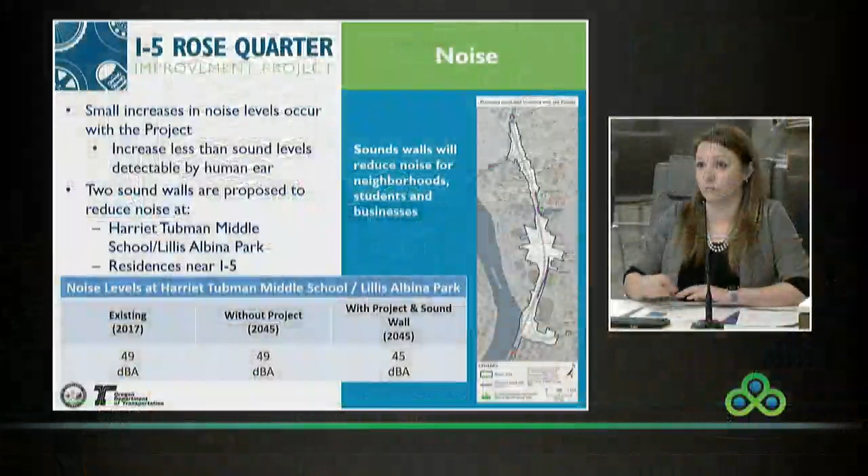All right, I'll quickly go through the remaining slides here. So in terms of noise, we also did a noise analysis, again in line with the Federal Highway Administration's noise model and field measurements that we took, including a specific measurement at the Lillis Albina Park and Harriet Tubman Middle School. And what was found here is that, yes, there would be a small increase in noise levels with the project as compared to not building the project. However, those sound levels are not at the level that would be detectable by a human ear.

That said, there are 2 sound walls that are proposed as part of the project to provide acoustic benefits to some sensitive receptors near I-5, including Harriet Tubman Middle School and Lillis Albina Park, as well as some residences in the southern portion of the project area.

I'm just highlighting the noise levels here that we're projecting at the middle school, showing the existing noise levels, and then the no-build or without-the-project scenario in year 2045. And then with the project and the provision of the sound wall, it would actually reduce the noise levels to below the existing noise levels that we see today in that area.

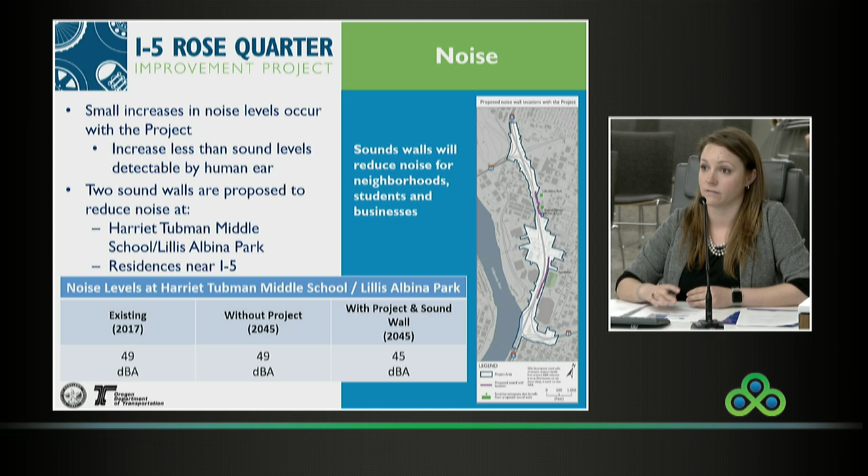A lot of the built environment, specifically land use topics, I think were covered in Mauricio's overview of really how this transportation project was done concurrently with the Central City 2035 planning, or at the time the North-Northeast Quadrant plan. And the MMA designation is also contingent upon a good faith effort in moving forward with this Rose Quarter Improvement Project. The project is also consistent with the Metro Regional Transportation Plan.

In terms of property impacts or right-of-way impacts, no residencies would be impacted or displaced as part of this project, but there would be 4 commercial businesses that would be impacted and displaced. We have a commitment as part of the environmental assessment, and we are required to move forward with complying with and following federal and state requirements for relocation and displacement of any affected properties.

Short-term construction impacts: the construction period will be about a 4 to 5 year duration. That does not mean that the entirety of the Rose Quarter area will be under construction during that 4 to 5 year period. We'll be looking at how we stage and phase construction, knowing that there are a high volume of users in all different modes and the need to keep the traveling public moving during this process. Commitments and mitigation in the environmental assessment include providing signed and safe detour routes for all modes, and developing a traffic control plan and an associated communication plan, again to keep the traveling public moving.

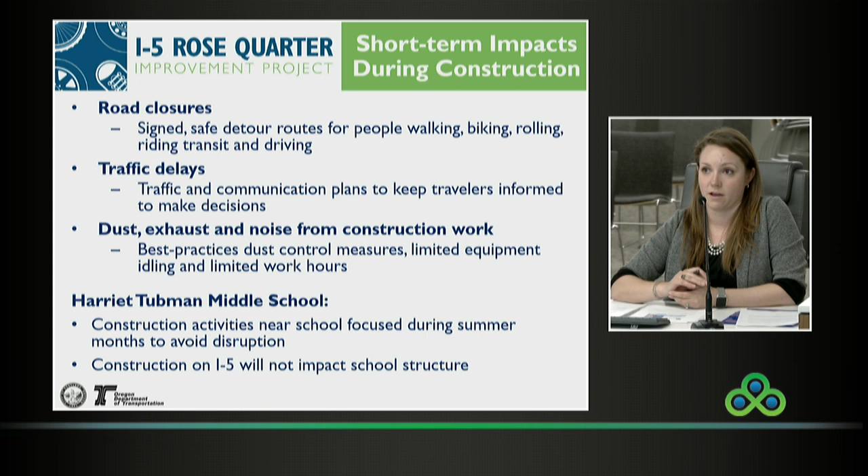Speaking of work hours, one concern we heard from the Portland Public School Board was how construction would impact the middle school given its proximity to I-5. We've committed, and included in the environmental assessment, to focus construction activities near the school during summer months to avoid disruption. Our analysis also found that construction would not impact the school structure.

So those are some of the key findings. There are a number of ways to comment and provide input on this process, including two events held earlier this month, an open house and a public hearing. Written comments are still accepted through April 1st.

A question about that—some of us are preparing comments with large electronic attachments, too big to send through your email channel. What's the best way to deliver those? There are a couple of ways. The email we have does accept large attachments, so I'd encourage you to still try that. My Gmail stops at 25 megs, so I'm constrained. We'd be happy to accept them on a flash drive delivered to the mailing address listed here. Does that sound reasonable? You could expect to see me on Friday or Monday.

Looking forward, one program we're standing up addresses a question we heard early in community engagement: with this significant project, what economic opportunities can it provide in terms of jobs or wealth creation for the local community? We're partnering with the City of Portland and PBOT to establish a DBE and on-the-job training or workforce opportunity program, guided by the principles shown here, to maximize opportunities for local, small, and minority contractors in project design and construction.

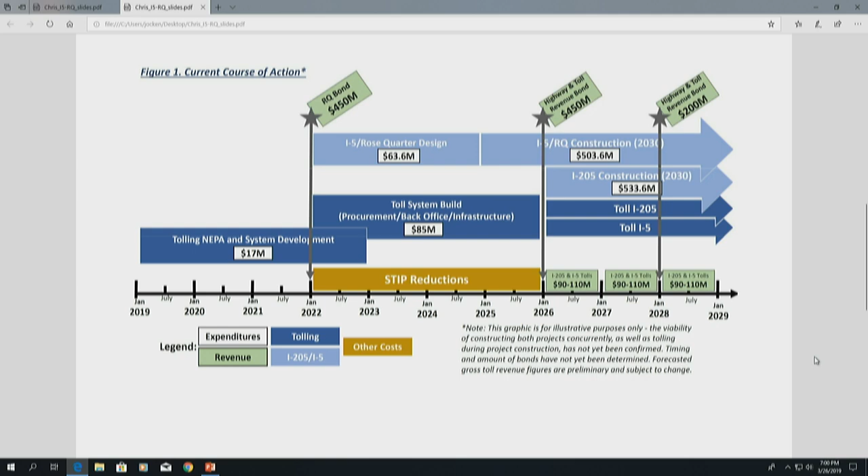So there's still a lot of, we're still in the initial, premature phases of value pricing. The work that was done over the past year was a feasibility analysis based on direction from the legislature in House Bill 2017 to look at the I-5 and I-205 corridors. And one of the recommendations from that group was to focus on smaller segments on each of those corridors. So we have an idea of the general segments, but we don't know the specific termini of where pricing could begin on those corridors. We also don't know what the type of pricing program would be, and for those reasons, it's too speculative to include value pricing in the baseline assumption for the Rose Quarter evaluation.

Looks like your boss is speculating on that program helping pay for your project. So if you're going to use the money, I think you have to include it in the traffic modeling, at least as a possibility. It could be a scenario, right? But I mean, the standard is reasonably foreseeable. This looks reasonably foreseeable to me.

I also just want to clarify, if I read this slide, it looks to me like the project cost is now up around $560 million between design and construction. Is there a new official range for what you think the cost of the project is? The cost estimate that we've done today is about $450 to $500 million based on current dollars.

Okay, so why is Ryan saying 500 for construction and 60 for design? That number may be projected to year of expenditure.

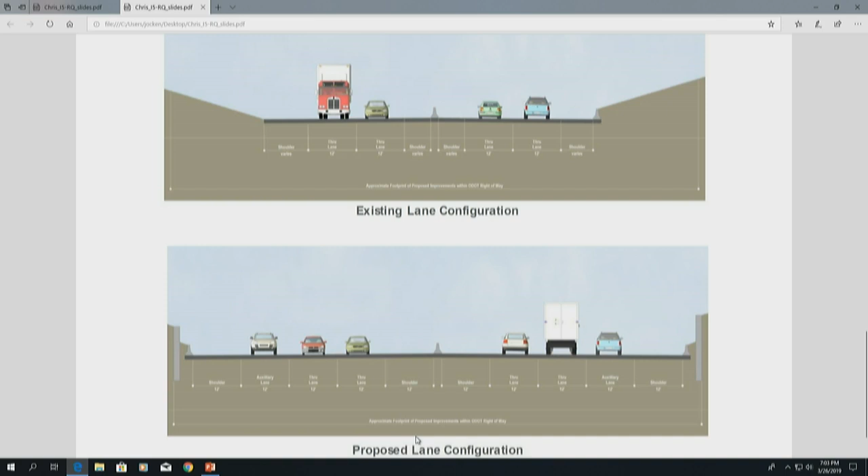Sorry. So this is a cross-section from the traffic report in the EA. And you have 3 travel lanes, 12 feet each, and 12-foot shoulders both on the outsides and in the center against the center median, correct? Those are really generous shoulders. And I assume they're expensive, because I would guess that every extra foot you have to span the freeway adds tens of thousands, if not hundreds of thousands of dollars to the project. So why such wide shoulders?

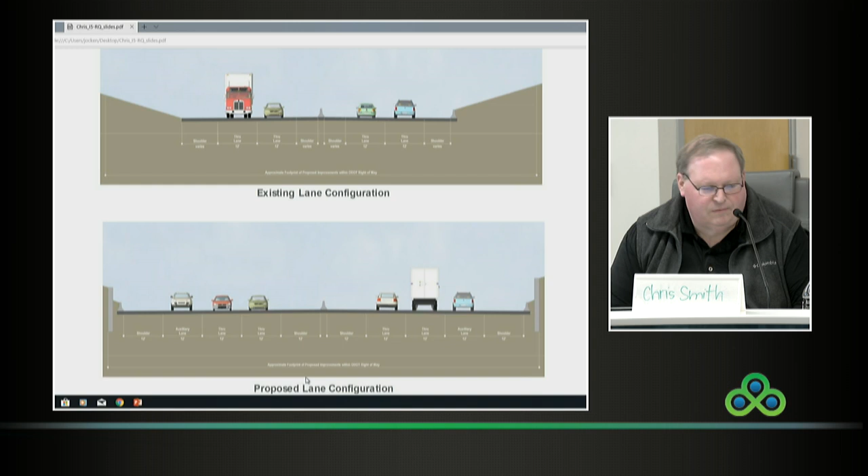So the shoulders, again recognizing that we're at 5% design, are currently designed to standards for urban interstates. 12 feet is the standard, and they provide significant safety benefits, not only space for disabled vehicles to move out of the way, but for emergency responders to use that space to access potentially an incident within the Rose Quarter or beyond. So is the Banfield considered a safe facility?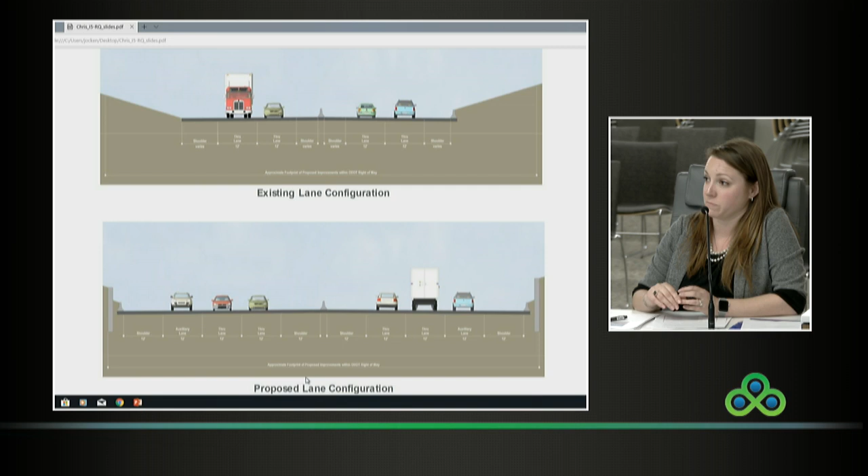I think that the Banfield also has limited shoulders as well—7 feet on the outside and 4 feet on the inside, and I think that's even been called out in some FHWA documents as a good practice. My point is that if you take all this pavement and cut the shoulders down to 7 feet and 4 feet, you could squeeze another travel lane on both sides. So I'm concerned that there's an 8-lane freeway hiding inside this project.

Can you tell us what would prevent an ODOT striping crew from going out there some weekend and turning this into a 4-lane cross-section on each side? I think at this point we've worked collectively with the city of Portland to define the parameters of the project, and it's not adding a new through lane, it's adding an auxiliary lane. We're consistent with city plans and consistent with what OTC directed us back in 2012 regarding auxiliary lanes as part of the project.

But would something stop you in 2035 from restriping the freeway? I don't think that is the intention here as part of this project. I sure hope so. Wasn't the intention to have the Columbia Crossing without any shoulders either, but we took out the shoulders to add a lane on the existing Columbia Crossing.

Okay, so I'm going to make a motion. Hopefully we can wrap this up and see if there's support for this. So yeah, obviously I'm—sure, Eli. Sure, oh sorry Eli, I guess just a thought.